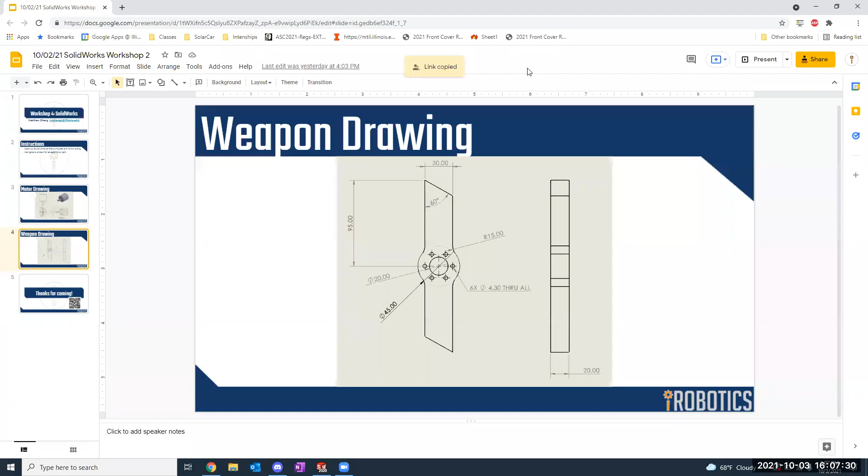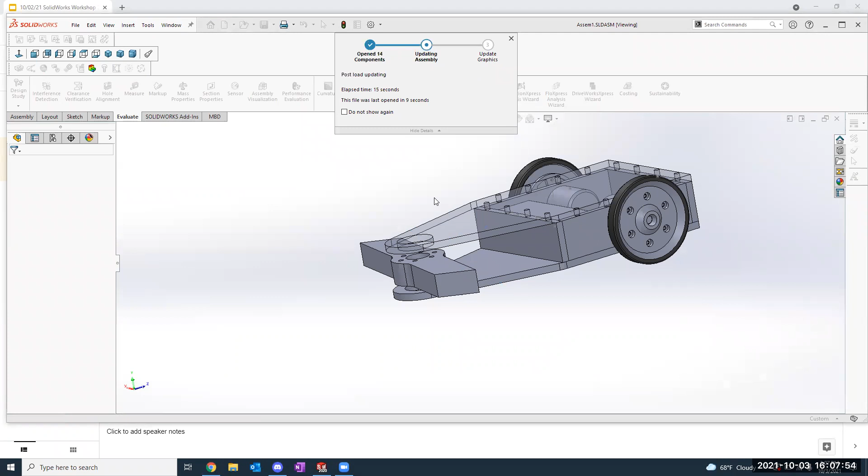I did forget to mention this last week, but we're actually going to be building up to this full robot assembly. I don't think I'll have you guys CAD every single part for the sake of time. We'll hit some interesting ones like the battery, the motor, or the weapon. Next workshop I'll probably be giving you the extra parts you're missing, and then we'll be assembling all these parts together in an assembly.

So here's the motor, here's the little battery that we CAD'd last time. I'll give you guys the parts for the walls and the chassis and also the wheels, and we'll basically follow along and put this whole thing together.

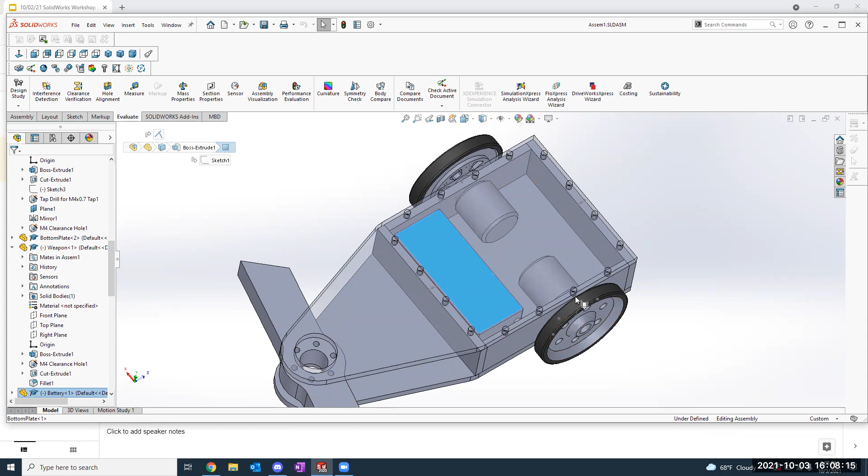Okay, so we're going to get started with making this motor. The first way we're going to do it is just using basically a lot of extrudes and a lot of sketches. Last time we talked about drawing sketches, extruding them into 3D profiles, and then turning that into solids, and you can stack multiple on top of each other.

If we take a look at this part, we see that we can do something similar. We could extrude the whole can of the motor as one part, then do the shaft, and then add some little holes in there. So we're going to start doing it like that, and then I'll show you guys another way to do it using a revolve feature.

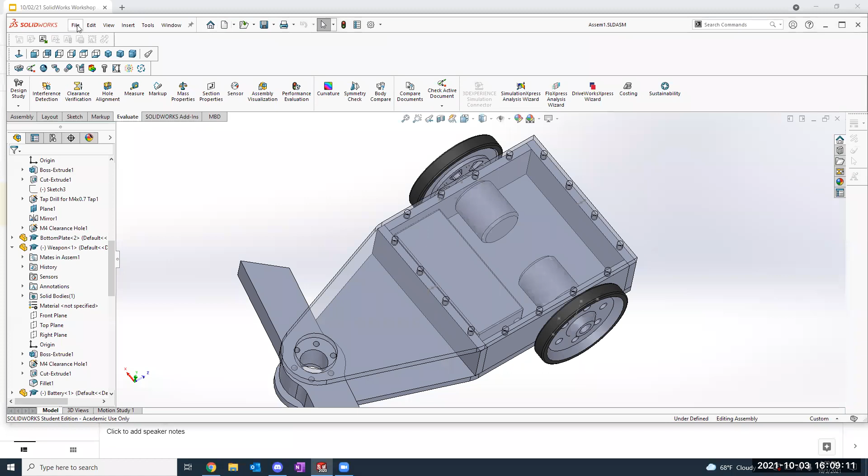So if you open up SolidWorks, go to File, hit New, and we'll make a new part for this. I'll give everybody a couple seconds to do that.

Again, when you're doing this, we're going to be CADing everything in millimeters. At the bottom right, check your units, make sure they're set to millimeters, grams, seconds. The very first time it gives you a pop-up and asks for units, it'll set a default unit. So for the purposes of these exercises, you're always using millimeters in case you accidentally set your default to inches.

And here we have the blank window. We don't have anything yet, so we're going to create a sketch. In the top left, hit the sketch icon, and we're going to choose the front plane.

Once you're on this front plane, we're going to create just a circle. The circle is going to be the main body of the motor. If we refer back to this motor drawing, from this cross-section view, this dimension right here shows the motor has an outer diameter of 32 millimeters. So we're going to CAD that first, just drawing a 32 millimeter circle.

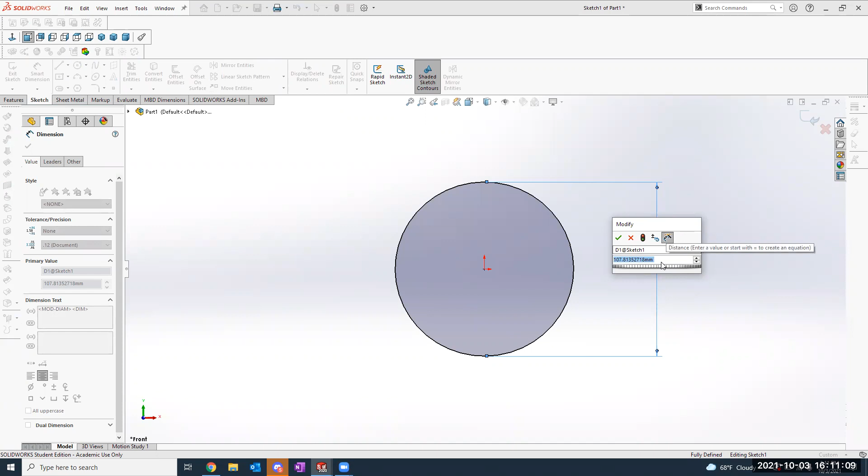Drag this out—this keeps showing up, I'll just stick that there. Draw this 32 millimeter circle, and then hit Smart Dimension. Click the circle, move your mouse out somewhere convenient, and then if you click again, it'll drop the dimension down and you'll be able to enter a number. Type in 32 and hit enter. Now we have a 32 millimeter circle centered on the origin.

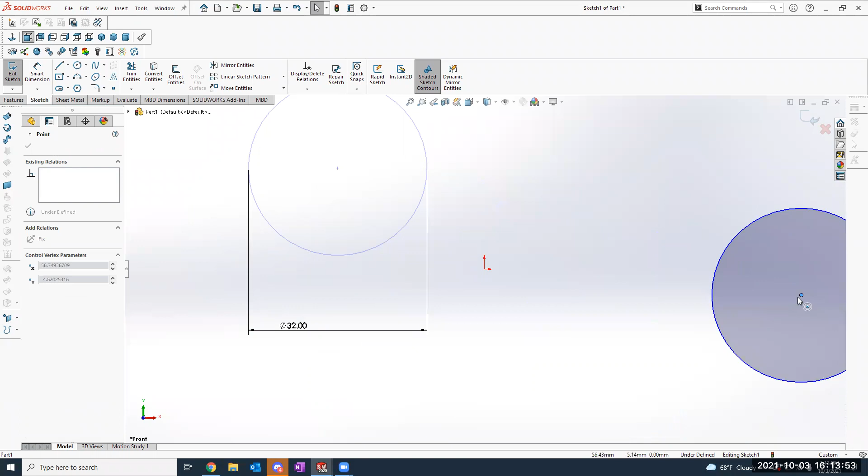It would be good practice to center it on the origin, because otherwise, let's say if I delete this circle and draw it somewhere else, then dimension it to 32 millimeters, the circle is just kind of floating, so I can drag it around wherever I want. For simple sketches like this it might not matter, but when you have more complicated sketches with more components, it's generally a good idea to have all your geometry fully constrained so it doesn't move around, meaning you've specified exactly where everything should be.

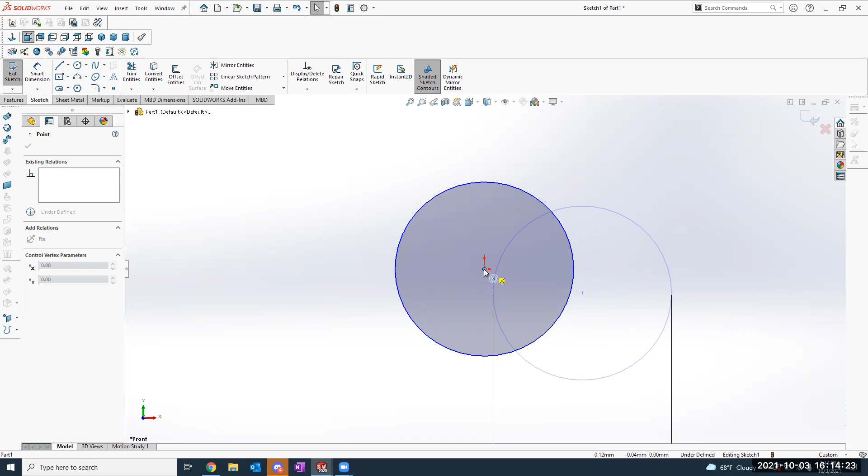SolidWorks will tell you it's not fully constrained if it's blue. Notice when you drag it over to the origin, there's a little coincident icon that shows up, which means the center of the circle is now constrained to the origin. And now the circle turns black, which means it's completely fixed.

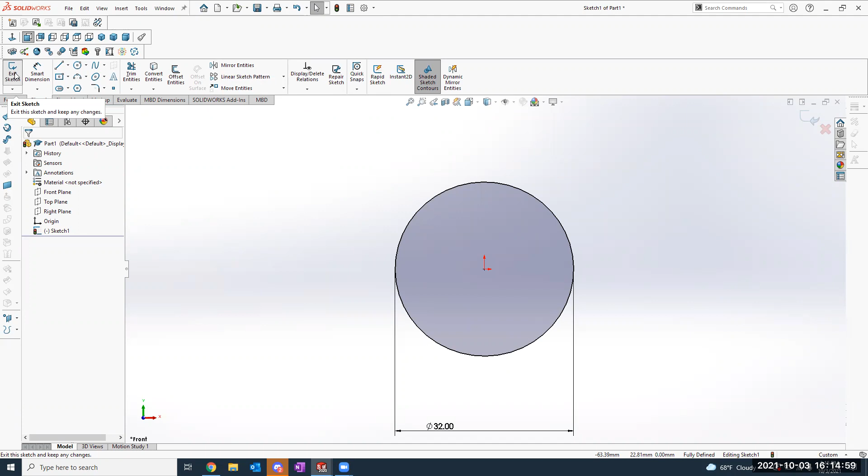All right. Okay, so once you're done with this, we can hit exit sketch. This is all we'll be doing in the sketch, and then we'll need to...

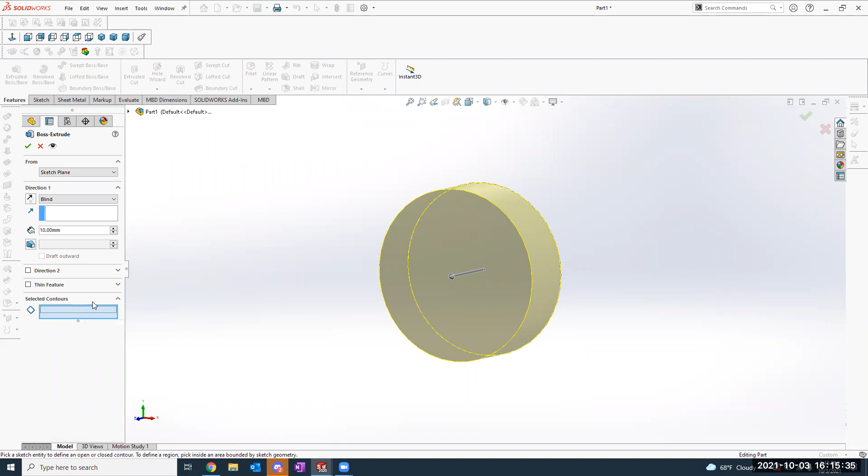Extrude this out by 35 millimeters, which is sort of the length of this motor body. So if you remember from last session, what we can do is go to features, then hit extruded boss/base. It might have the sketch selected by default, but if not, just mouse over the sketch and click it. Then it should show you a preview of what's happening here, and you can type in 32 millimeters right there and hit enter.

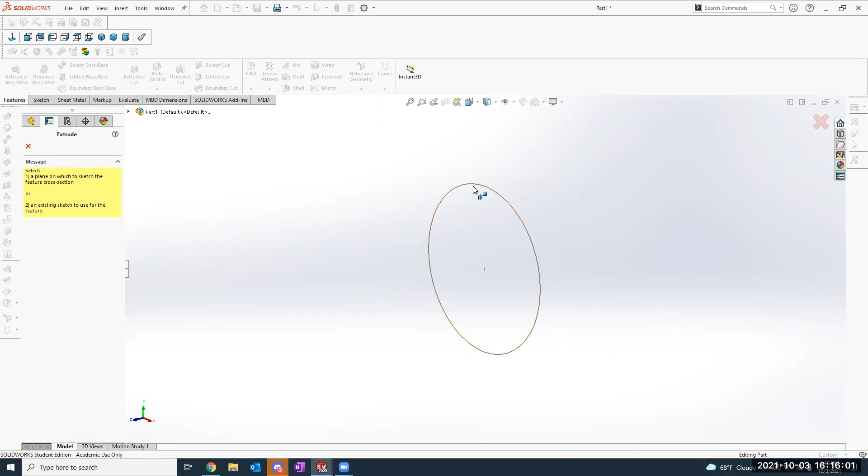I'll go over that again real quick. If you hit extrude and it asks you to select the sketch, you can select the outer profile of the sketch, like right here, just click it. Then it'll ask you how far you want to drag it out. We want to pull it out 32 millimeters like that, and then we'll hit OK.

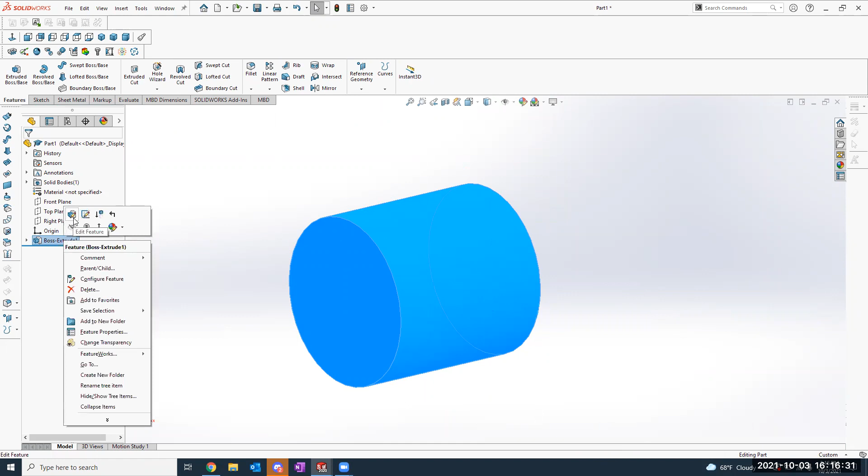All right, or actually, sorry, 35 millimeters. So if you accidentally press 32, you can right click on your extrude, click edit feature, and then hit 35 millimeters. All right, I'll give you all a little bit of time to do that.

You wanna turn it off? I think it's just a graphical thing.

All right. Okay, so the next thing we're going to do is extrude this motor shaft out. If we look at the side profile in the cross section, we see this is an 8 millimeter diameter shaft.

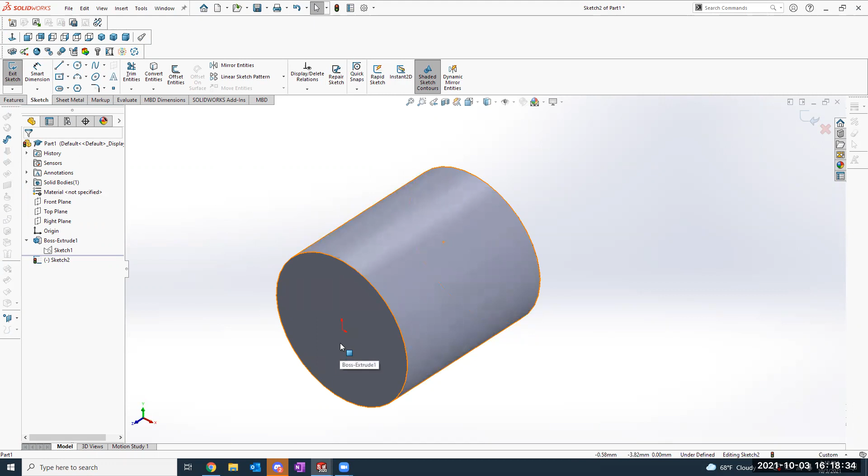So we're going to draw basically just a circle on the face of this cylinder. We'll start a sketch, go to sketch, and create a new sketch on the face of this motor. Then you'll see here we have an origin right in the center. If you want to reorient yourself to face the sketch, you can hit space and click on the view cube to reorient yourself like this. Then we'll draw here an 8 millimeter diameter shape.

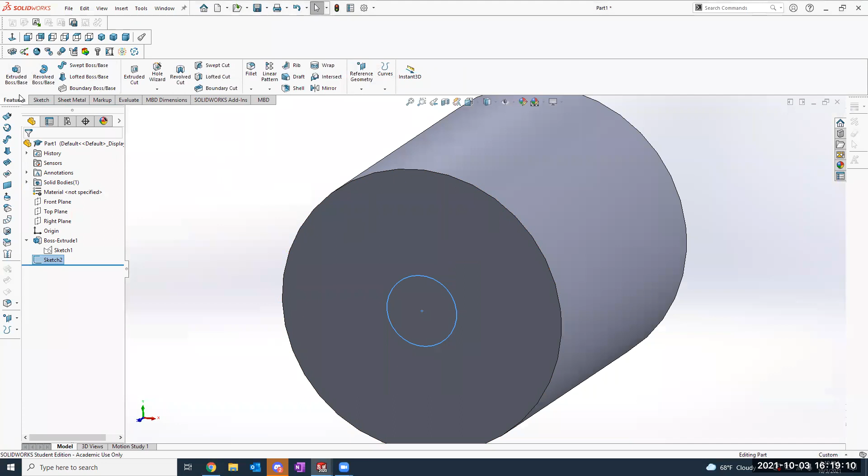Hit exit sketch, and then we go back to the motor drawing. We see that the motor shaft is 19 millimeters long, so we're going to extrude the motor shaft to 19 millimeters. We do the same thing as before, and we're just going to hit OK.

Can you repeat what the diameter is? Yeah, I think the diameter is 8 millimeters, length 19. Yeah, 19. Okay, yeah.

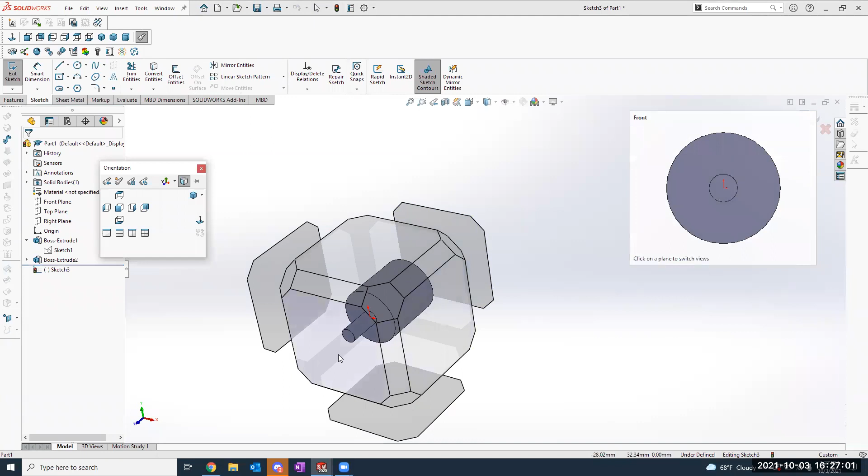And then if we want to reorient ourselves to look straight on, we can hit space just once and then click on this face right here. Now we're looking straight at it. So we're going to create a 10 millimeter circle.

That's representing, if we go back to this drawing, the outer diameter of this little divot in here for the bearing. And then what we're going to do, since we don't want to cut away this entire region, is do a projection of the motor shaft instead of creating another circle.

So what you can do is go up to the top, select this convert entities button, and we're going to select this face right here. Then you'll hit OK. And now you have two circles. Basically, the face that we selected got projected onto our sketch.

So now this edge, the circular edge, shows up as part of the sketch. You can use this to copy model geometry into your sketch. So if you added something else, you can hit project and it'll bring it into your sketch so you can reuse that.

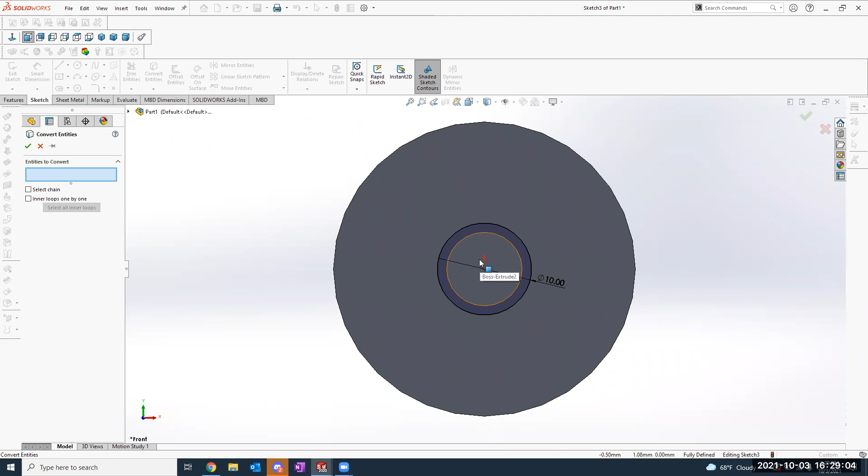So I'll come around and help a little bit. For anyone who missed what happened there - what we did was go to the top where there's this convert entities button, click that, and then select this face right here. Now you see that face shows up on the left - it's converting this face. Then if you hit this check mark, it basically takes the circular edge of that face and puts it onto the sketch.

So now this sketch has two entities - this circular edge and this outer circular edge.

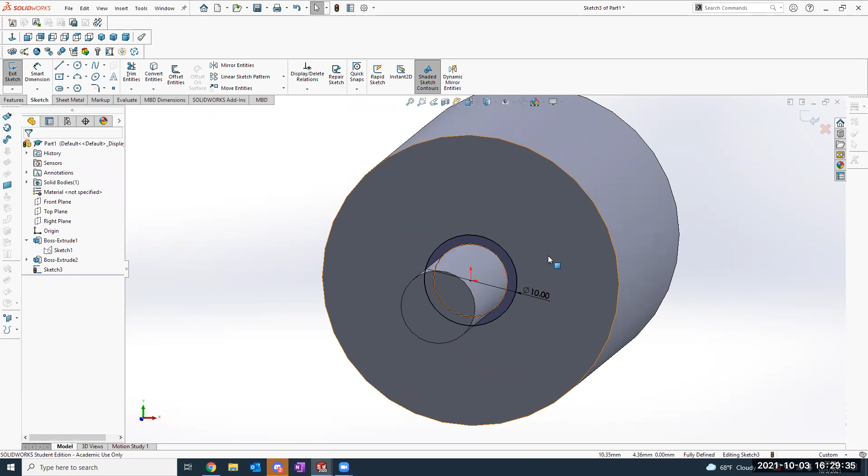Basically, in your sketch right now you also have this center circle. So you put this edge from the bottom - yeah, it projects it - and also the inner hole. You project the motor shaft, it's important.

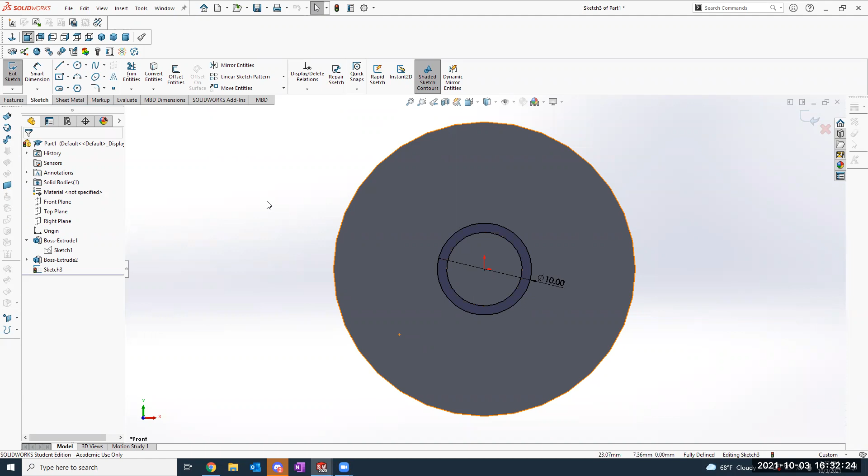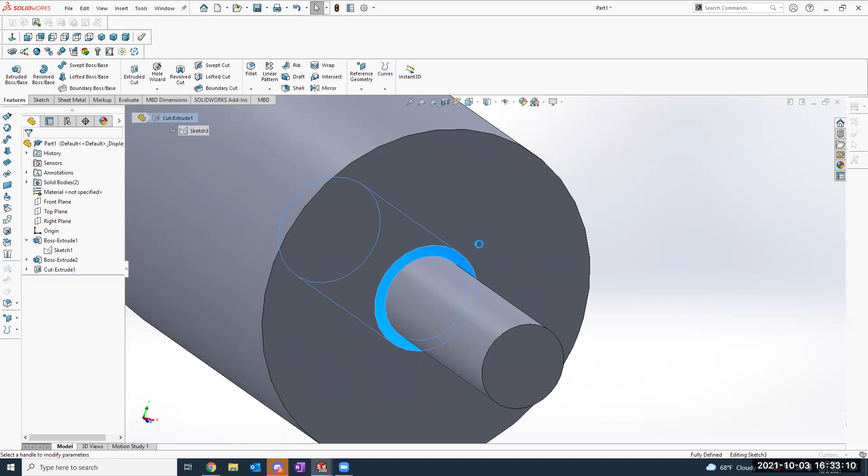So if you got that down, what we'll do now is exit the sketch and extrude. This time we're going to do an extrude cut. If you need to cut into geometry you already have, hit the extrude cut button, then select one of the edges here. In this case, if you just hit this, it's cutting this whole circle into your part.

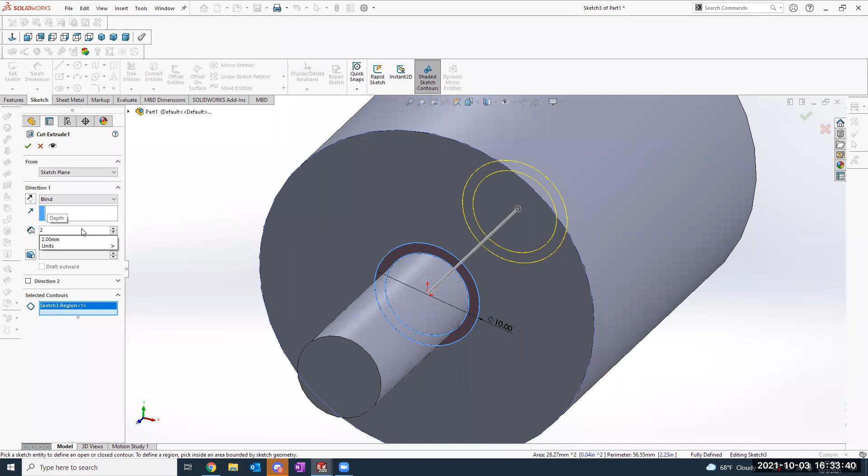Now you've got a floating motor shaft and floating motor, which you don't want. So we need to specify exactly what region we want to extrude cut. We'll delete this, then select this outer circular region, that ring shape right here. That ring shape is what we're going to extrude cut into the part, at a depth of 2 millimeters. Then hit OK, and it should look like this.

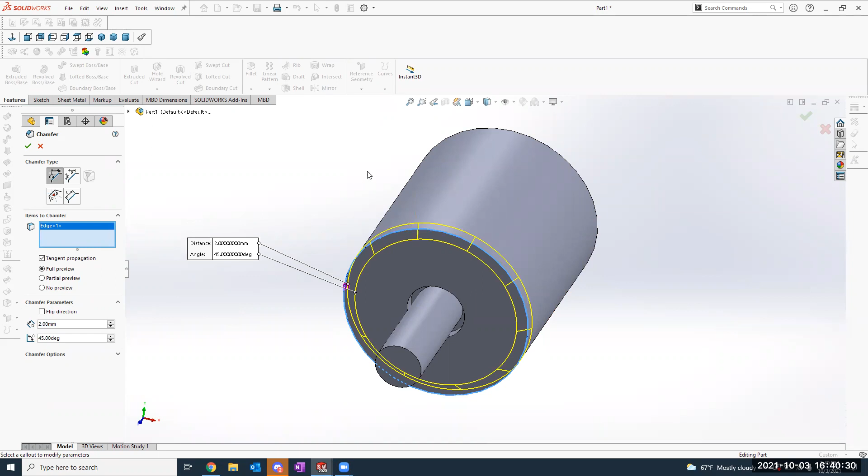Now we'll select this edge. You can use your mouse, press down, rotate around, or press down on the middle mouse button, and rotate around here. You'll select this edge. If you're not getting a preview, you can toggle some of these options, it might be set to no preview by default. If you set it to full preview, it'll show you all the edges you chamfered like this, then you can just hit OK.

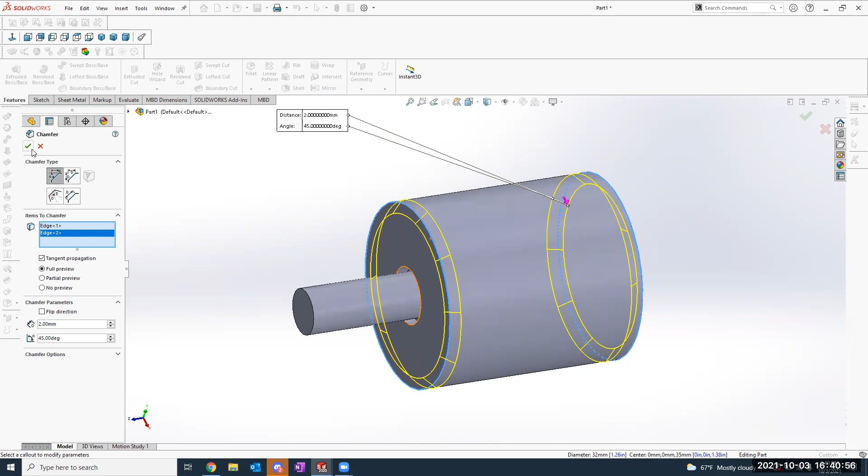We're also going to add a half a millimeter chamfer on this edge right here. This time we're just going to do 0.5mm. Select this edge and hit OK.

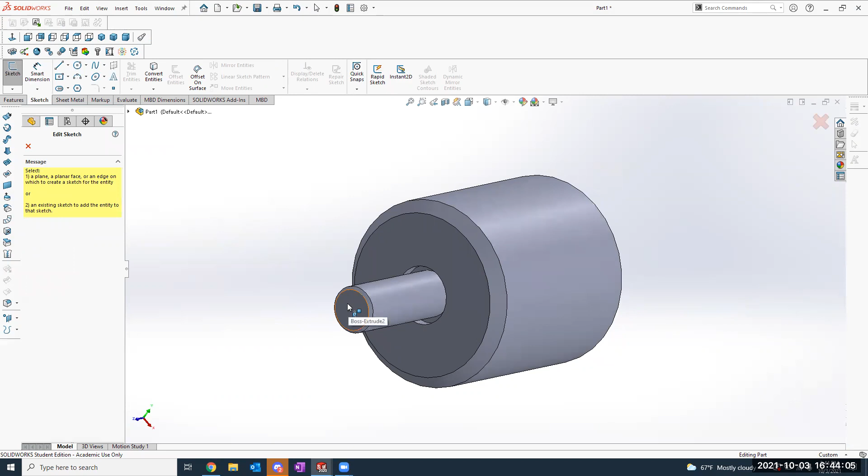We're going to start a sketch right on the end of the motor right here. And then we're going to reorient ourselves to, sorry, give me a second.

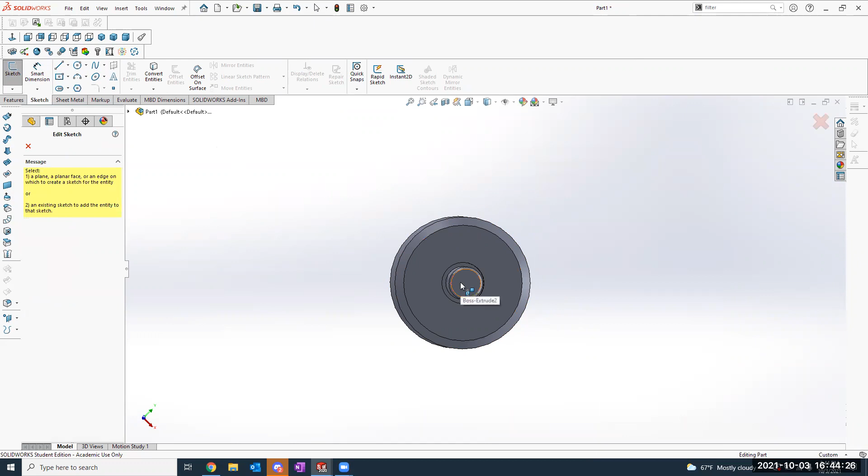So create a sketch right on the end of this motor. And then hit space to view normal to it, like that.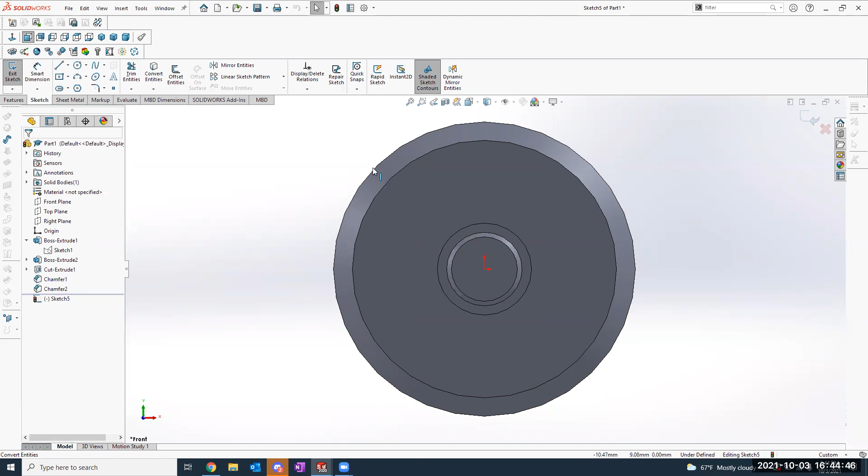Now we're going to convert this outer edge again. If you hit Convert Entities, you can mouse over this outer edge of the motor shaft, the second inwards edge, and click on it. You'll see it appear on the left, then hit OK. Now you should have a solid black line around here.

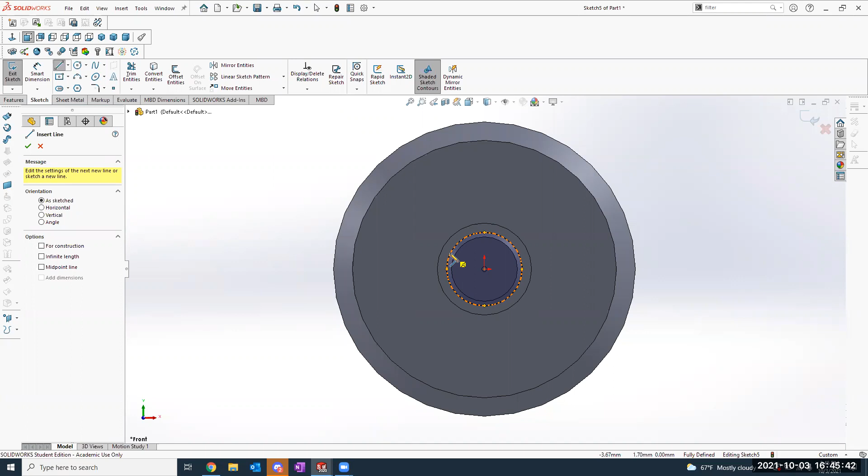Now we're going to draw a horizontal line. Start your mouse somewhere in this region, making sure it's over the outermost edge of that circle, so one end of the line is on that outermost circle. You'll see a yellow coincident symbol near my mouse, meaning one end of the line is fixed to that circle. Click on that edge and drag out horizontally. You'll also see a little horizontal line icon, meaning this line is fixed to be horizontal.

I'll move it all the way out towards the other end of this circle, right there, and click a second time. So now we've got this edge right here, this circular edge, and also this line.

Now what I should be able to do is put a dimension. Give me a second... I have a filter selected for some reason, I don't know why.

Okay, we're good. So we wanted to dimension this 1 millimeter off of the top, essentially the distance between this point right at the top of the circle and this line. We want to cut off the top 1 millimeter of this circular shape.

So we're going to put a point right at the top of that circle, right there. If you click this point button here and move your mouse, it should snap to the top center of the circle. You should be able to put a point down there — we're just going to use that as a reference for the dimension.

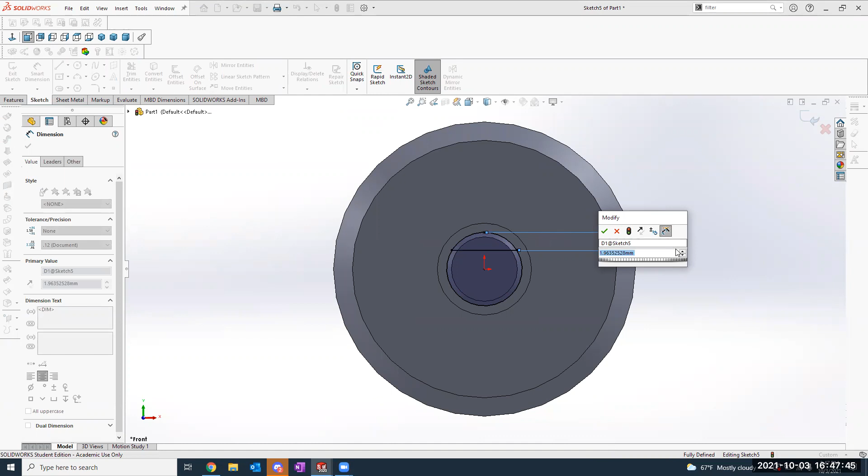You can do a smart dimension between that point and this line, and we're just going to make that 1 millimeter, like that. Okay, then you'll just hit enter. I know I did a lot of steps, so I'll stop after this.

What you'll do next is go to Trim Entities at the top left. You'll notice we have a lot of extra geometry — we don't need this circular part on the bottom since we only want to cut away this profile at the top. Hit trim and click and drag your mouse through the bottom right there. That cuts away the extra geometry, this extra circular geometry over here that wasn't connected to this line. Once you're done, you can exit the sketch.

If you want, I'll show you guys later, but you'll basically just extrude this as an extrude cut, 19 millimeters. I'll go around and help people out right now because that was a lot.

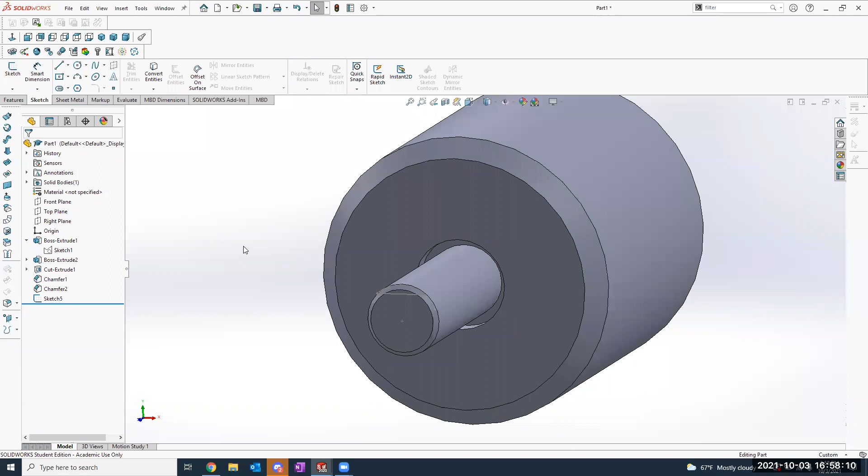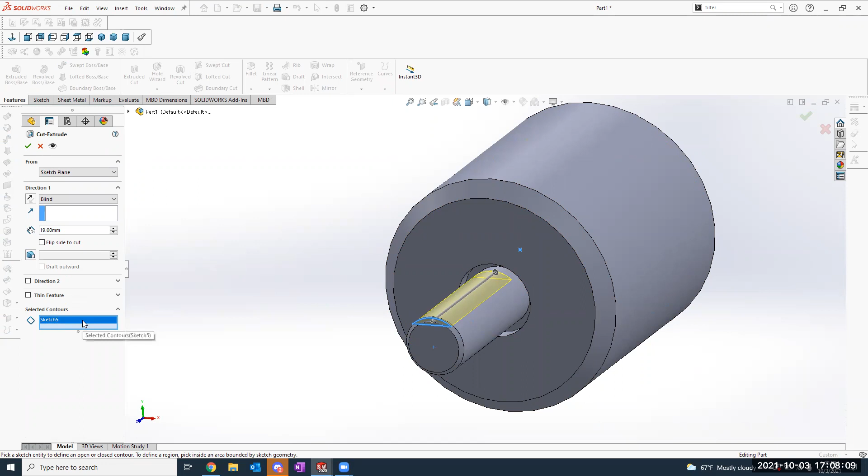So what we need to do is add these holes, or actually extrude cut this into the part. We're just going to select the sketch. Typically when you do an extrude cut, you have to select part of the sketch, but what I like to do is click the sketch first and then hit extrude cut. That'll prevent it from automatically selecting one of the contours. If you do it right, it'll automatically select the entire sketch, and if you only have one contour or closed shape in there, it'll select that for you. But if it didn't, you can delete that, zoom in, and select what you need.

And we'll extrude that 19 millimeters, like that, just hit enter. So now it'll cut into the motor shaft like that.

And then lastly, we're going to add in our holes. These are special cap holes. You see here there's a huge hole call out - we're not going to worry about that too much for now. We're just going to start a sketch on the face of this motor and put down points to get the hole locations down.

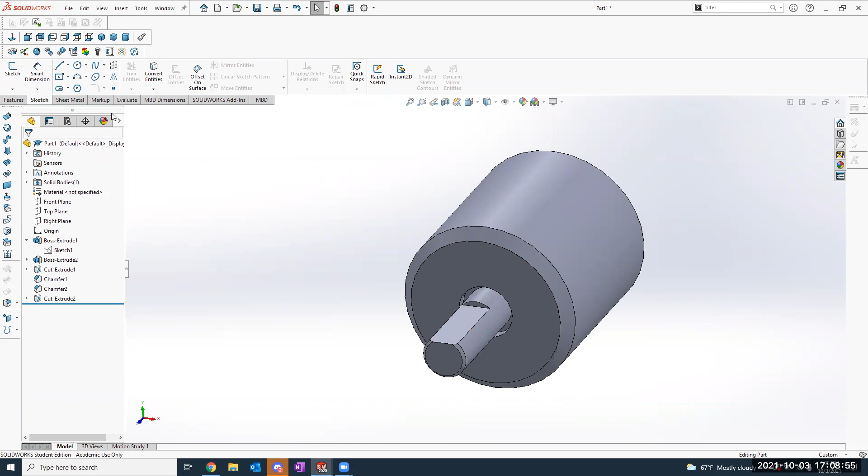So we'll start a sketch on this face right here, hit space, and look at one of these views to look in the direction of the sketch. We're just going to place a point down. Make sure you hover over the origin and bring your mouse up vertically - you'll see a dotted line. That means your line is centered exactly vertical from the origin. You're just going to plop it down somewhere above it in this region.

And if we check the drawing again, we see that these holes are on a 20 millimeter circle, which means this little point is going to be 10 millimeters up vertically from the origin.

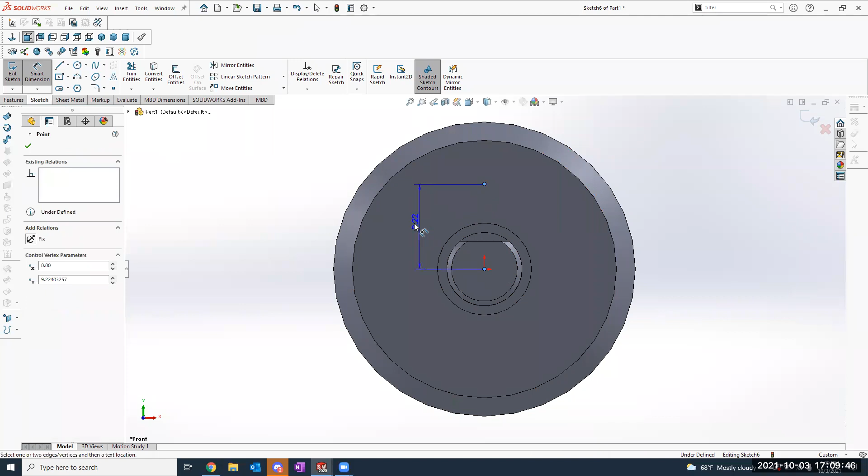Turns out my point wasn't actually constrained vertically, so you'll see it still kind of moves around. If this happens to you, what you can do is click on the point, hold down Control, click on the origin, and then say vertical, like that.

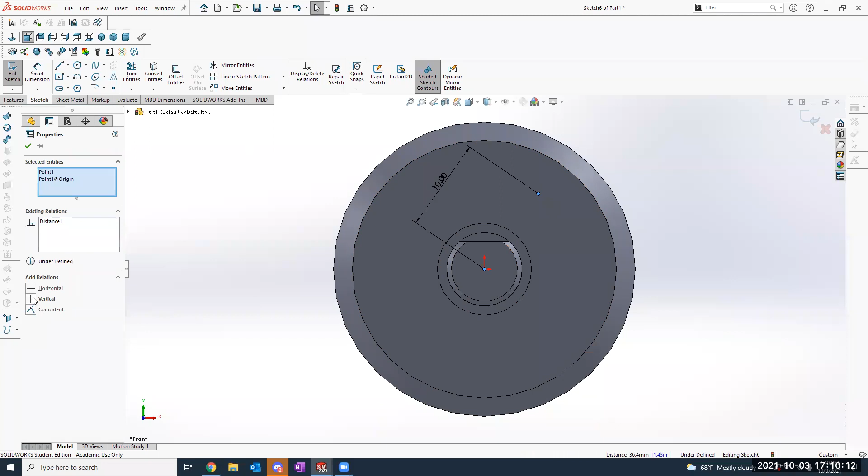All right, so let's try to do this real quick.

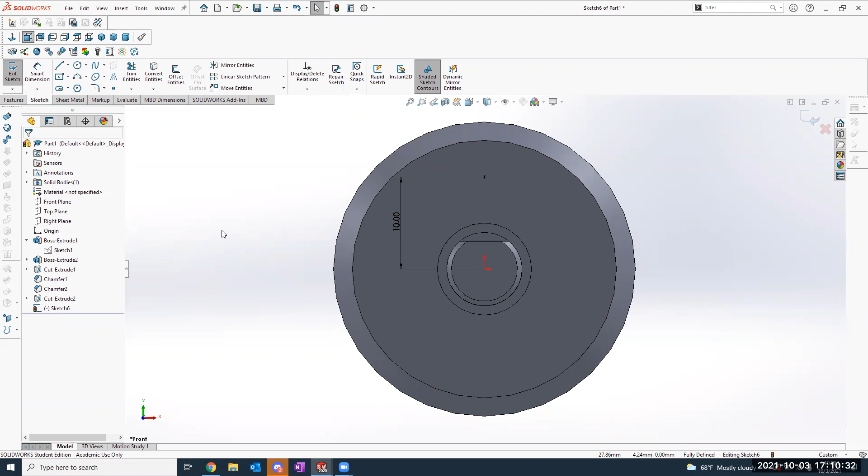So what you need to do is put on the point. What that does is...

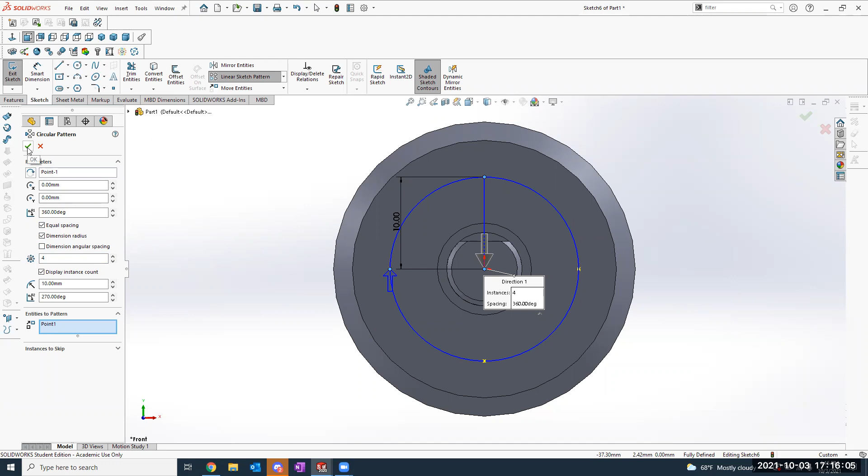And now we'll have these four points here that we can select. You'll notice these can kind of move around—they aren't fully constrained. So you can constrain this point right to the center like that.

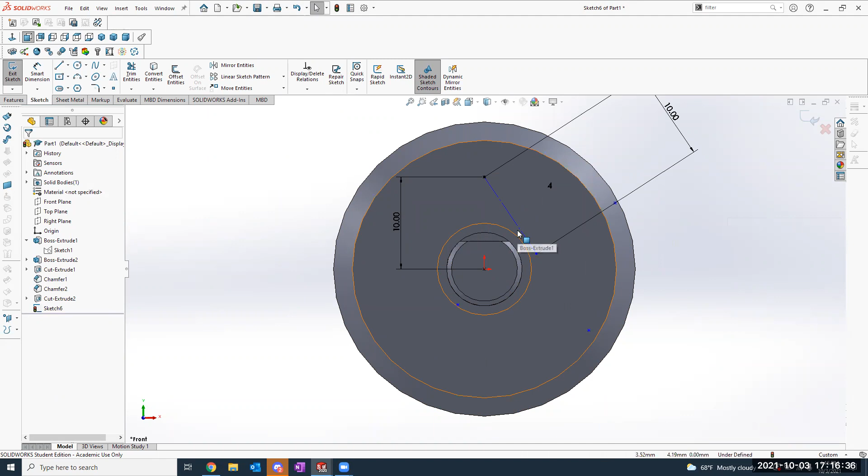You'll just drag it right to the center. Okay, cool. You can just set this line to be exactly vertical, and then it'll kind of align everything for you.

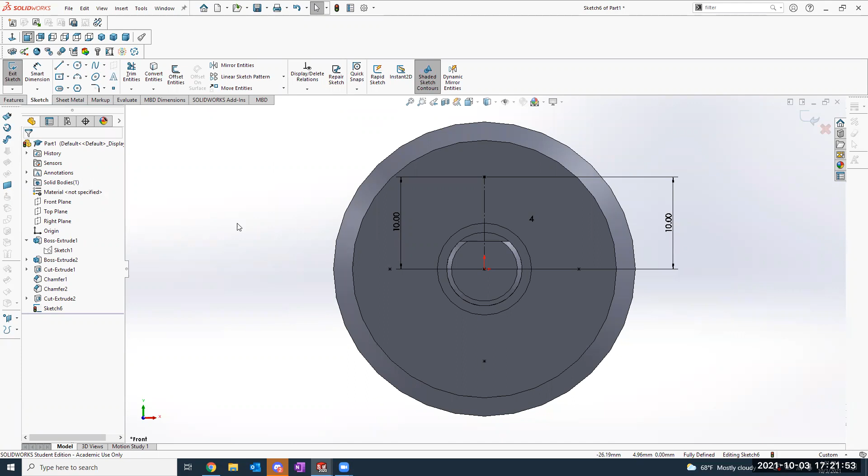So now finally we'll cover the last step. After you have these 4 points, you can exit the sketch. Then we'll go back to features. There'll be a hole tool—the hole wizard—you can click on that.

On the left, it'll give you a ton of options for holes. What we're going to do is choose a tapped hole—this option right here, the middle left one. A tap hole is a hole with threads in it for a screw. If you look at the hole call out, this M4x0.7 means we're using an M4, 0.7 pitch tap hole.

So if you change your standard to ANSI metric, and set type to tap hole, you should have a size here called M4 times 0.7. You can choose that. Essentially just make your options here match what I have.

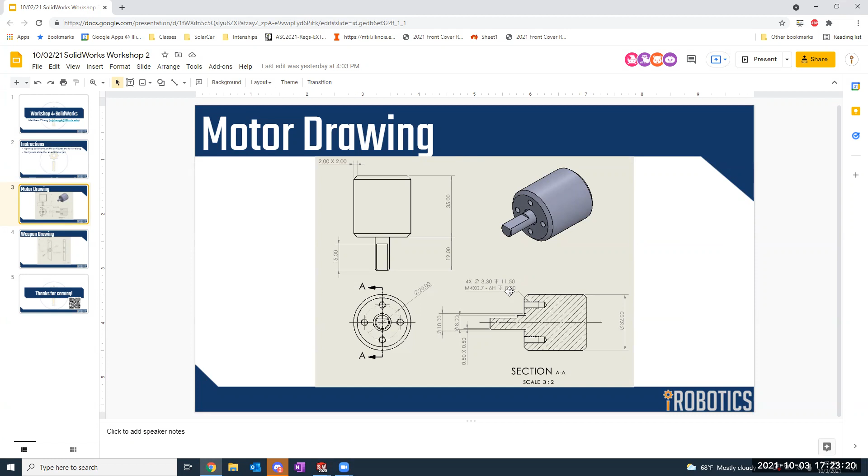And then you can set a depth through a hole, you can just type in here. If you look at the hole call out, it's 11.5 millimeters deep, and then the tapping is 8 millimeters deep. So set this from whatever it is initially to 11.5, and then set this to 8—it should have it configured correctly. Basically have all your options set to this.

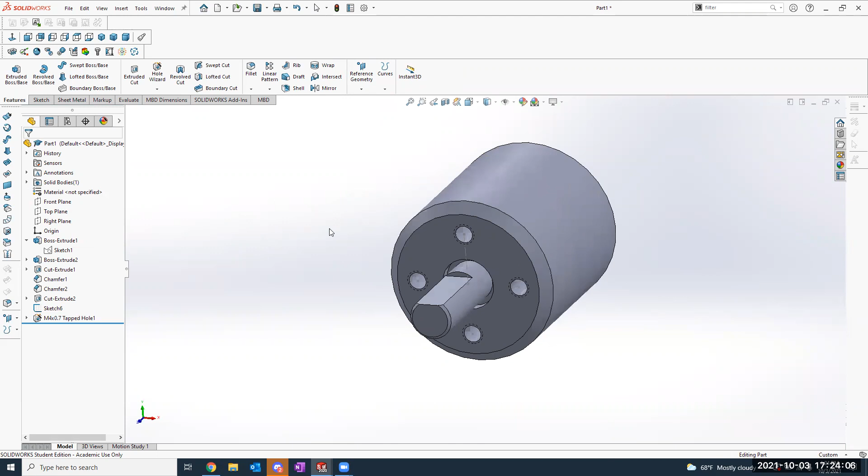And then you can go to positions, and select this face. Then you'll be able to mouse over and click on all your points. Then you'll hit OK, and it'll put holes there exactly how you specified. So I'll open up this menu real quick just so you can see what I had.

The advantage to doing it this way instead of with an extrude is if you create a drawing of it, it'll be really easy—SolidWorks will automatically fill in all the hole specifications for you. Also if you need a special type of hole, like a tap hole, you won't have to go look up the tap hole diameter and stuff like that. This will fill it all in for you.

So essentially, make sure you have the standard set correctly to ANSI metric—that will be the first thing. I'll set the type to tap hole. Make sure you have this hole selected, the straight tap hole, and you'll need to set the size to M4 by 0.7. I'll leave that up. Basically, just make sure your menu matches, with the standard set to ANSI.

Oh yeah, you might need to change your end condition as well—this might be set to through all by default, which will cut through your entire part. We want a blind hole, so switch it to blind, and it'll show you the depth. The first depth is how deep the physical hole is, and the second depth is how deep the tap is in the hole.